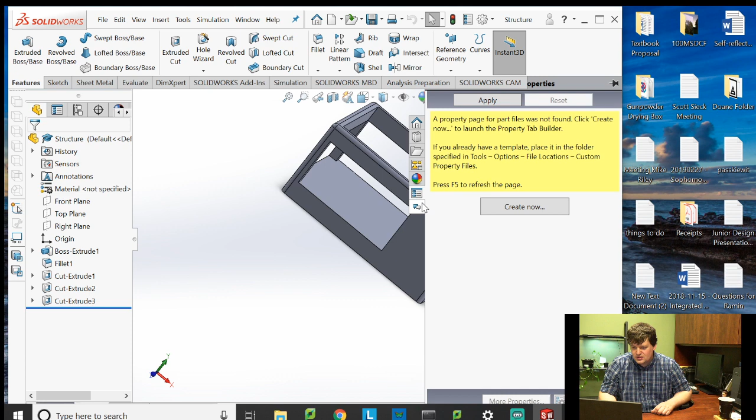Oh, you mean get bigger? I don't want you to get bigger, I want you to get smaller. Why are you so unnecessarily irritating?

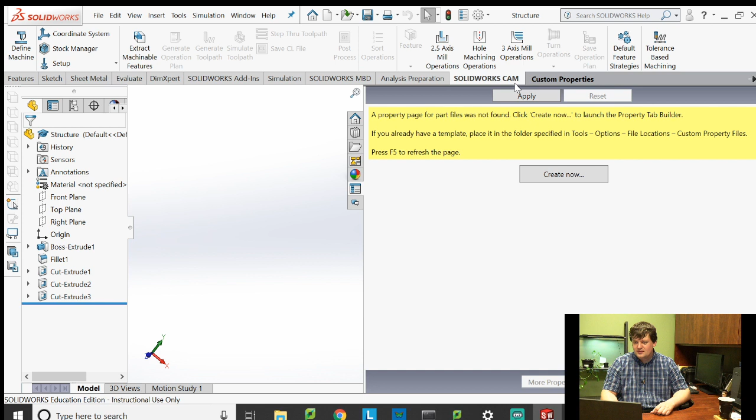Yes, hi, I am teaching you SolidWorks, and I'm struggling with very unnecessary issues. I can't see it because the button I need to push is right here. I'm going to have to hide a few of these.

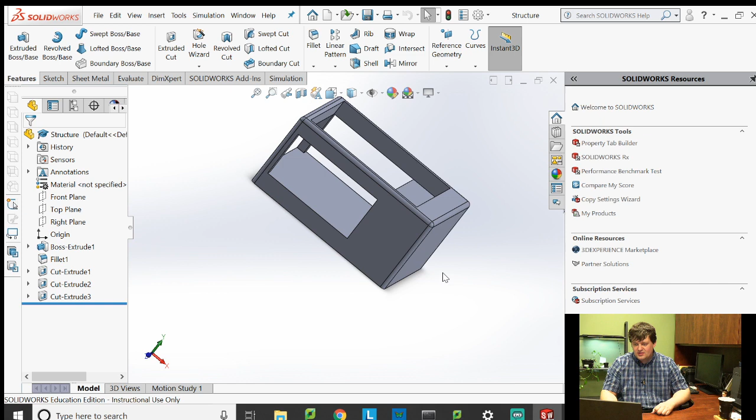Awesome, okay, so here's my structure that I built last time. Let me check, okay. Man, I wish I could make that go away. It's like you can either make it stupid huge, or you can make it kind of huge. Either way, you don't like it.

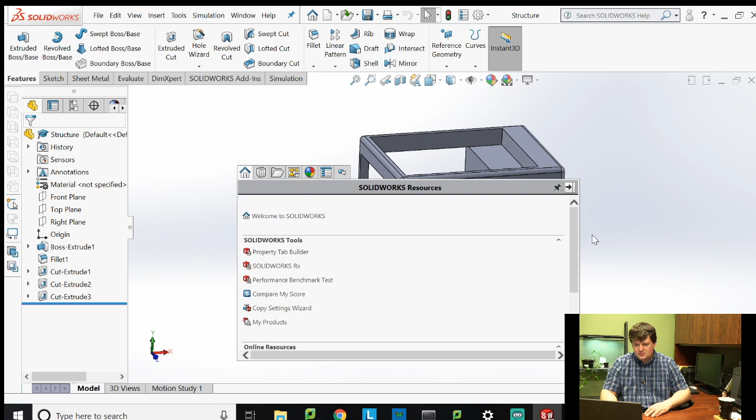Ooh, I can go directly into the SolidWorks forum right here, did not know that. I don't know this. Die. I only want you gone. I call you my only friend, but I have many friends.

I'm gonna hide it over here, not best practice. I cannot get that thing to go away. I want to pop this up so that I can actually see in case somebody leaves a comment. So, okay, I was doing so well at the beginning. Started out with a great video feed, everything looks good.

Anyways, okay, what we're going to be talking about today is assemblies. Now, assemblies are kind of a weird thing to deal with, because if I were to just take this into an assembly, this looks fine, this is a great part, perfect. But I haven't built this in such a way that I'm intending to connect things. The hardest part about any mechanical assembly, any one of them, is always going to be in how you get the parts to connect together.

There's no nice formula of, oh, well, just glue them. No, that's not always best. And if you're looking at a system like this, where are you gluing it at? How are you making sure it's staying in the same place? How are you going to glue it and then make sure that the wires connecting to it, that are powering it, are getting the power and aren't being jumbled? So really, anytime you go to make an assembly, you have to start thinking: how are my pieces going to come together?

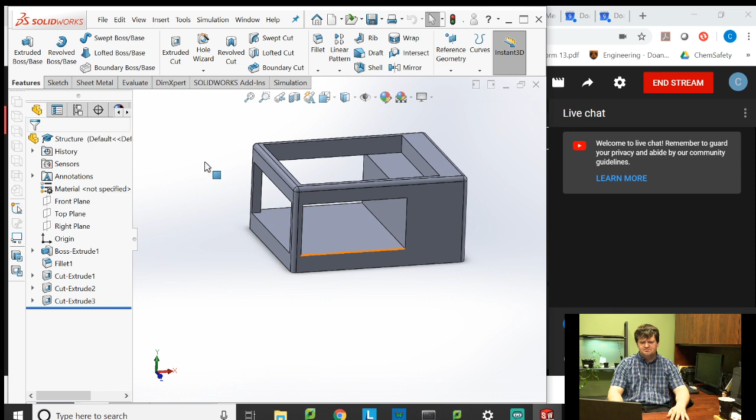So go to File, New. This is how you create new parts, new assemblies, or new drawings. Here we don't want to do an assembly yet, we're going to work towards it, but we're going to start by building a brand new part. I'll hit OK.

And I've got a new part. You'll notice that my SolidWorks down here now has two windows in it. I can either go back to my structure or go to my brand new part. It's kind of nice to have both of them open, though SolidWorks sometimes hates that because, quite frankly, it's murder on your CPU and GPU. But I'm going to go in here, and the first thing I'm going to do is go into Sketch, and click Sketch.

Sketch on the top plane, because that's how I roll. Make sure that my axes are orthogonal. If it's not orthogonal, it's rotated like something like this. You can just click on the Y-axis, brings you right back here to where you can see your origin is pointing up and to the right, so we're in a good place.

Clicking, if I double click here on the Y - whoa, I clicked out of the sketch. Let me click on top plane again. Now it's sketch 2 because sketch 1 disappeared. If I double click here on the Y, you'll notice that it flips this. What it actually does is it flips around, takes your view, and looks at it from the back side - like you're looking at the front side of your hand versus the back side of your hand.

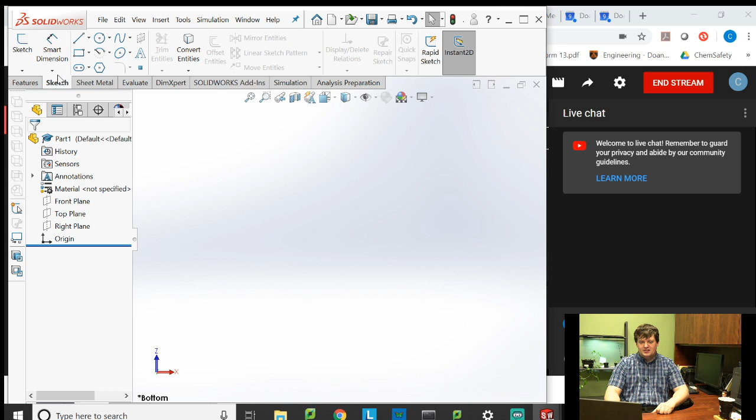Okay, I exited out of my sketch again. Double click out here, apparently it doesn't like it. Oh, he's done! I was not done. I want to make a plate.

Now what I'm going to do for my hot plate is, my hot plate is probably going to have a heating element embedded in it, and it's probably going to be cast iron. A lot of hot plates are very, very good conductors of heat - basically a giant heat sink. Thick, sturdy, robust, impact resistant. We can coat it with Teflon.

I'm not going to include the coatings on this. I don't know how to do that in SolidWorks, and quite frankly, just putting an arrow that says put a Teflon coating on this is way better. It does everything you need it to do.

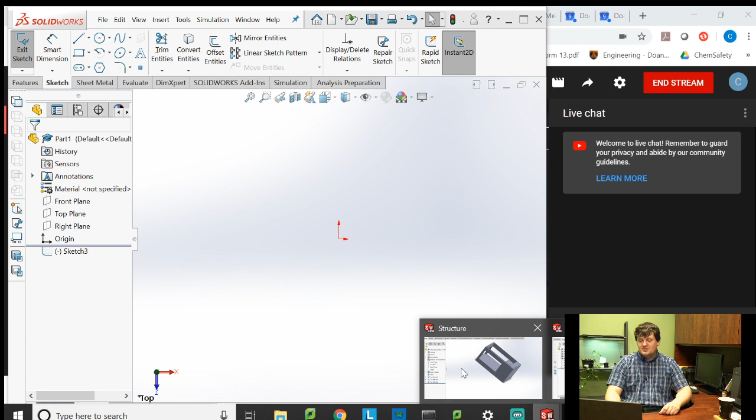So I'm going to go back to my old file and say, okay, I'm going to be building a hot plate that is going to be going right in here, in this microwave-like box. I want to have some kind of a hot plate where there will be some connection for wires, some place where I can bolt it in, maybe pin it in, something. But as I'm thinking about this, I've got to think, how are these parts going to go together?

Because I'm going to have to make both of them such that they do go together. If they don't go together well, it's just like, hey, got this hot plate, throw it on there, you pick it up, it slides off. That's not quite good. How are we going to affix these two together?

We have a lot of different connection options. You've got bolts, you have glue. Glue and epoxy are acceptable, but if you're going to do something like that, usually it's good to create a profile on both pieces such that they fit nicely together, and then you epoxy it, because then it will always be in one place. The person who goes to assemble it will take the hot plate, cover the bottom of it with epoxy, and then stick it into some hole that has been specially designed only for the hot plate.

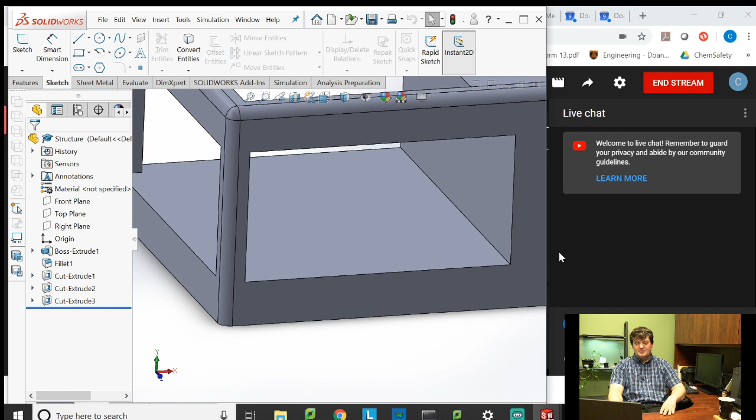That's good practice, because then there's only one method of assembling it. We're going to talk a little bit about design for manufacture, design for assembly later in another lecture, but just giving you a preview here. It's really important to think about how these are going to be built. I could build this fairly easily, but to attach anything to it would be harder the way it's built right now.

First things first, I'm going to go to the top view. This is my old drawing, and now the distance from here to here is basically my window between these four walls, the window that I have to build a hot plate in. I can slide that hot plate in from the side, probably have to turn it at an angle, and then lower it down and connect it somehow.

What I'll probably do is, for simplicity's sake, slide the hot plate in, and then bolt it in at the four corners. I'd probably use some kind of special protruding bolt with maybe a rubber gasket, a rubber head on that bolt so it doesn't corrode, probably coat that with Teflon too. In any case, I'm going to have to make bolt holes in this structure so I can bolt it to it. Simply enough.

So first I need to know these dimensions so I can make a hot plate. What I'll do here is, before I build the hot plate, I'm going to go to the top view by clicking on Y, or I can go to View Orientation and click on that top view. Here I'm looking at the top view.

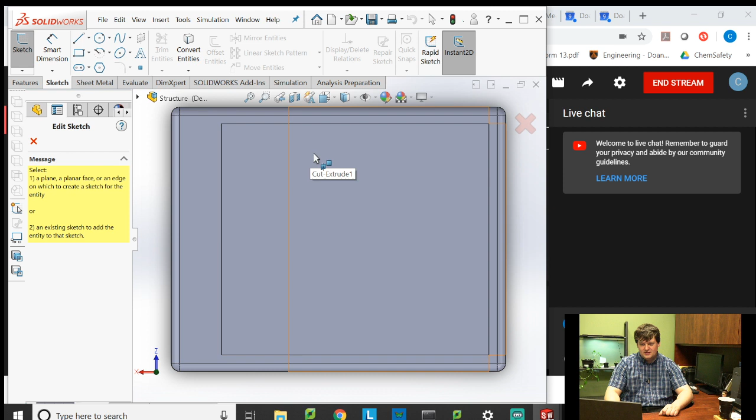I want to make a hot plate that goes in between these four lines. So that's awesome, I'm going to go ahead and draw a circle. I clicked sketch, clicked on here, and now I'm drawing directly on the bottom of where I want this hot plate to connect to.

Okay, so here's the front corner, here's the front face of it. I'm going to create this circle. And what I'm going to do is say, what is a typical bolt dimension? Well, I like 1/4 inch bolts.

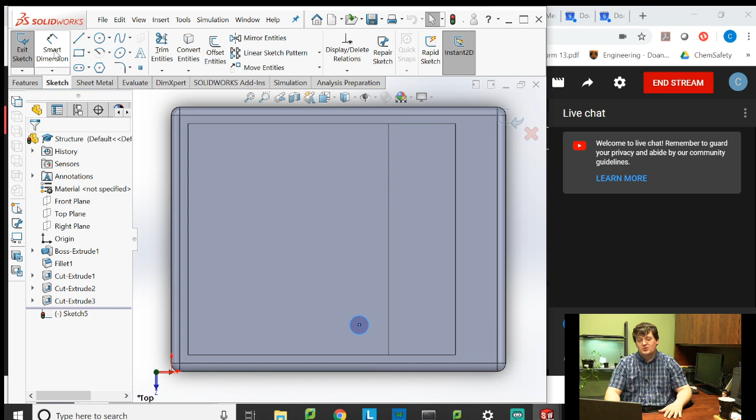So I'm going to click dimension, click on this circle. What I can do with the dimension on the circle is say how big the circle is going to be. Right now it's about 1 and 3/16, which is a gigantic bolt. I don't need a bolt that huge to connect these, so I'm just going to type 0.25. Okay, that's going to shrink the size of this hole down significantly.

And if I zoom in on it, you can see it's still there. I don't know where it's located at, I just know I have a 1/4 inch circle that I'm going to turn into a hole.

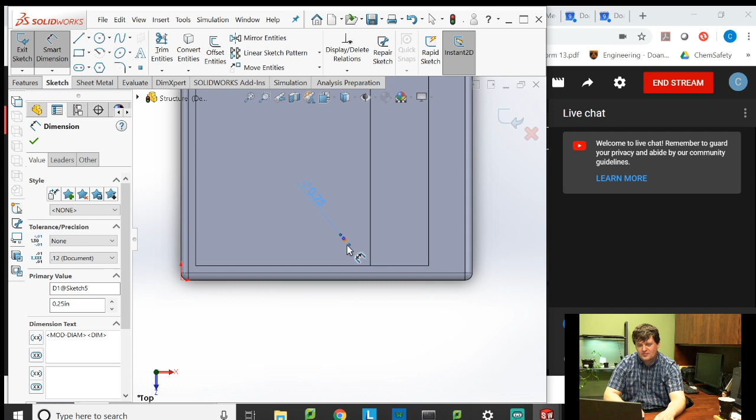Now I want to dimension from the center of this circle to this edge right here. I don't want to put my bolts directly on the edge, because then the cast iron might shatter - it's really not very strong. You might get some sliding in there. If you put it a little bit inset from the outside, it's better.

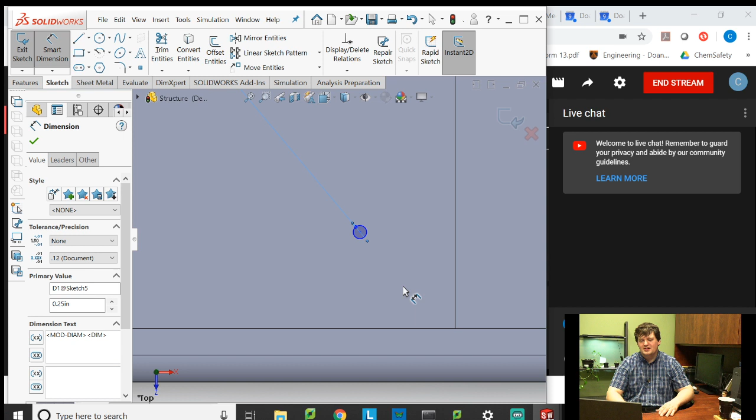So what I'll probably do here for my hot plate is make it go all the way to the front and back on this side, but it won't go all the way outside here. So I could probably put this dimension from this face here to the circle.

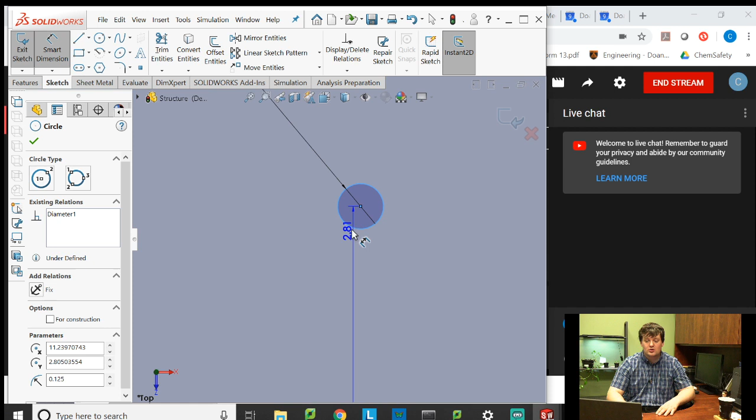Now, if I click on the circle and click on a line, it automatically goes to the center point of that circle because it realizes you can't dimension anything else on a circle. I could maybe select a 1/4 point on this circle - top, bottom, left, right sides - but it automatically defaults to selecting the center of the circle. And I've got this line, and now it's calculating the perpendicular distance between them.

That perpendicular distance - a point and a line only ever have a perpendicular distance. Because any other distance, like if my angle is going out this direction, suddenly that changes the dimension. If my angle is going out this direction, the dimension becomes much larger. A perpendicular distance is a constant value that you can share between a point and a line.

So click on this - I don't want it to be 2.81 inches from the outside, I want it to be 1 1/4 inch. Okay, so 1 1/4 inch from the outside.

And then I'm going to dimension from this face here. Notice I can actually select the center point of the circle. If you just select the outside of the circle, it will also select the center of the circle. So it's like 2 different options to do the same thing.

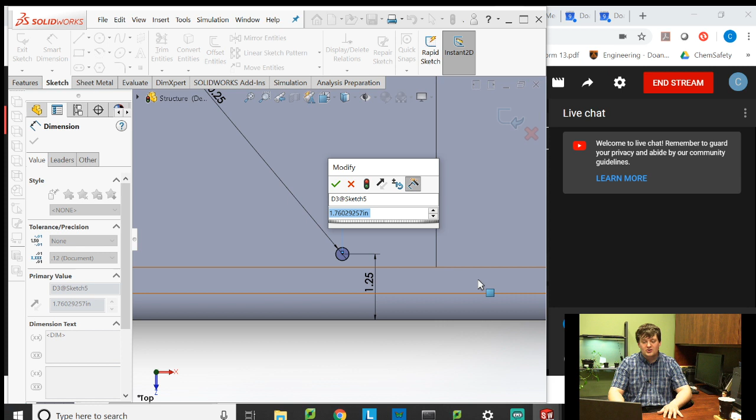I'm going to make this one come in also 1 1/4 inches. That's nice and square, so I got 1 1/4 inches from here, 1 1/4 inches from here. Good to go, this is my first bolt location. I'm going to unclick Smart Dimension. Now this circle here is fully defined. I'm going to want 4 of them, 1 in each corner.

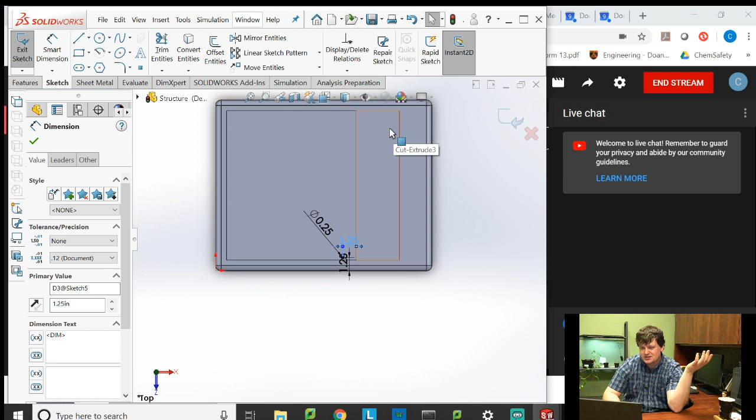There's a couple different ways of doing this. You can do a linear sketch pattern and go ahead and specify this distance here and this distance here. That's fine. I don't really want to do that, because if I change my dimensions here, then... well, you know what, I'll do it anyway. I probably won't make this dimension.

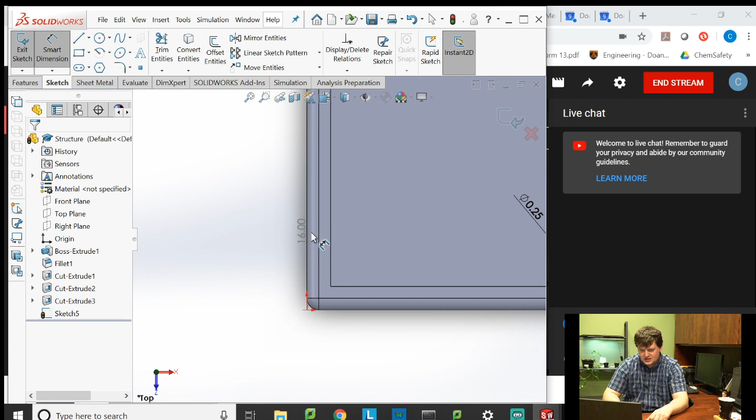I need to know some information before I do a linear sketch pattern. I need to know my distance. So where are... I want to do a linear sketch, I want a dimension, I want to know how long it is from here. Oh come on, let me select that. Oh, it's not letting me select that. Oh, that's unfortunate. Where is...

Ah, there it is. So if you go into your Evaluate tab, you can click on Measure. Measure is basically like dimensioning, but it's specifically for when I want to know the distance between two lines, the distance from here to here. If I click on these two lines, it'll tell me this, the 2 points that I click, this line is 14 inches long, which is great. This whole thing, I believe, is 16 inches long.

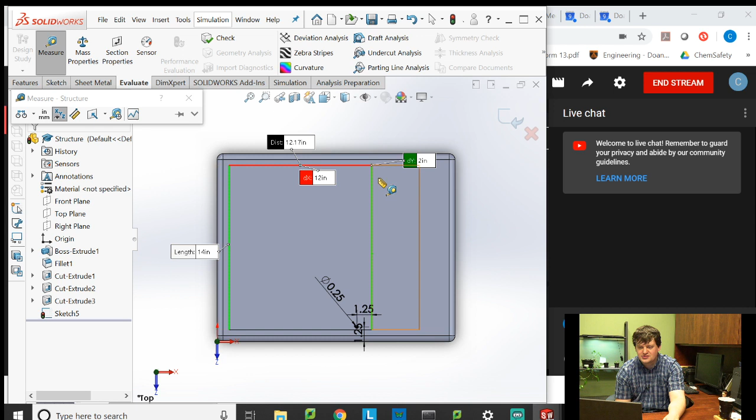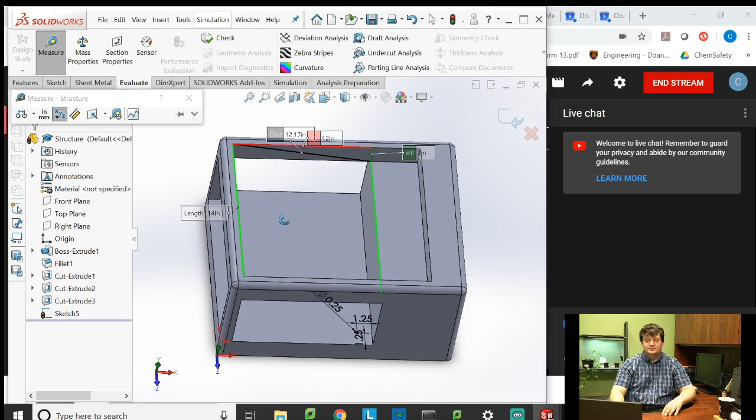But this distance here is going to be 12.17 inches - 12 inches in the X direction, and 2 inches in the Y direction. Now one of the issues we have is one of the edges we're selecting is down here on this plane, while the other edge is up here on this plane, so there's actually a 2-inch drop between them. So if I just look at the distance number, it's not quite accurate. The X number is accurate because it's only in the X direction. You'll notice there's a 2-inch drop there - that distance is actually measuring across that angle.

So if you're going to use the measure command, be careful because it won't give you a dimension just in that view - it'll give you a bunch of information, and you need to know which one to really look at. Here I only care about the X distance between here and here. I don't care about the Y distance, I don't care about the actual distance between those lines, I only want the X distance. So 12 inches is what matters to me - I'm going to have to make my hot plate 12 by 16 inches.

Go back, look at the top of this device again, and I'm still in the sketch - I haven't left the sketch yet. Now I'm going to go ahead and create a linear sketch pattern. On the x-axis, this is 12 inches. I have it at 1 1/4 inch, and I want this to be 1 1/4 inch on the side, which means 12 inches minus 1 1/4 minus 1 1/4 is 12 inches minus 2.5 inches, which is 9.5 inches. So my spacing in the x-axis direction is going to be 9.5.

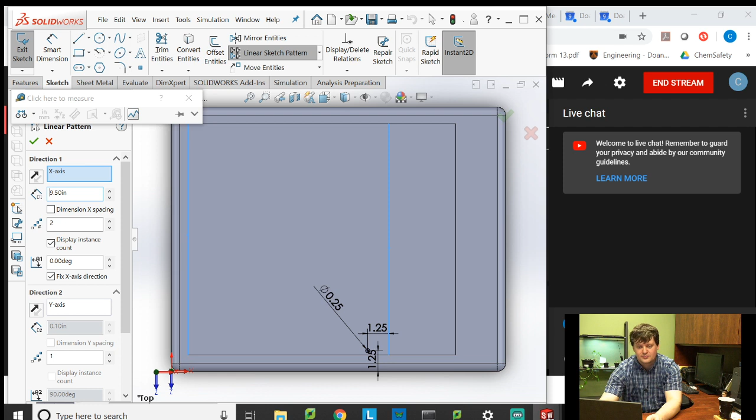I'd actually be putting it way out there, I don't know where - oh, I haven't selected an object yet. Okay, in the y-axis - I don't want just one row, I want 2 rows. As soon as I do that, now I can enable putting something in the y-axis, and I want this to be this overall distance, 16. This is 1 1/4 inch - I want this distance here between the hole and the outside to be 1 1/4 inch. So 16 minus 2.5 makes this 13.5 inch spacing.

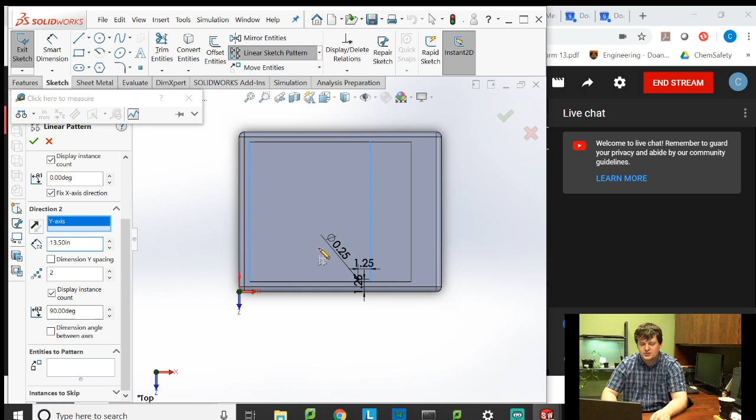13.5 inches, okay. Notice it's still not showing anything up here, nothing is changing. I've put in my numbers, did the calculations. I have 0 degree offset, I have 2 by 2, 2 rows, 2 columns, it's going to create 4 total. I haven't selected an entity to pattern - that's a problem, it doesn't know what I want to create a linear pattern out of.

So I'm going to go in here, click Select Entities to Pattern, go in here and select this circle. Now as soon as I do that, you'll see it's created a rectangle. I want it to go this way, I don't want it to go this way, I want it to go that way. So what I'm going to do instead is flip the direction of the x-axis - it'll move it this way. And now what I see is 1 1/4 inch from this direction, 1 1/4 inch this direction, 1 1/4, 1 1/4, all equal spacing. Kind of a weird optical illusion because there's no way this distance is equal to that distance.

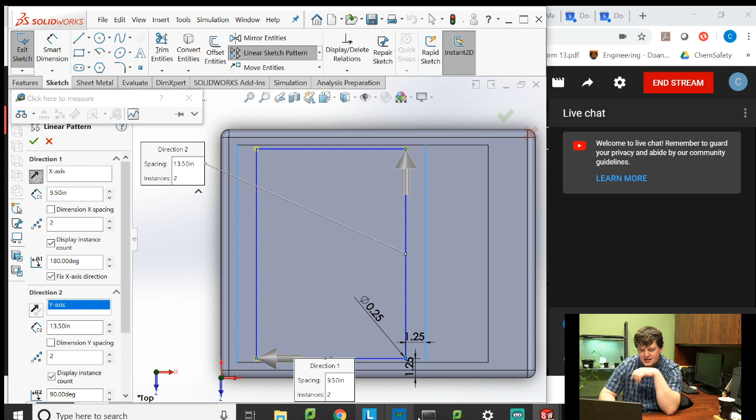Oh wait, that's right, we want this distance. We're in a good place, we're okay. And this distance up here is equal to that distance down here. Whole thing looks good, I'm going to hit yes.

Now that's one way we could do it if we wanted to drill all the holes at the same time. We're going to hit exit sketch, it'll create those 4 circles. I'll go back into features, and instead of doing the extruded boss base or the revolve, which is also a cool feature, we're going to do just another extruded cut.

You can do a hole wizard, but I don't like those. They're very challenging to work with for me. Never quite figured it out.

Here it automatically selected the sketch plane because that's what I had picked. If I scroll around, it'll show you where these are cutting. It's only cutting 1/10 of an inch. You know what? Let's cut into this thing 1 inch. Let's have a nice, good, deep bolt set. We're never going to have this hot plate move.

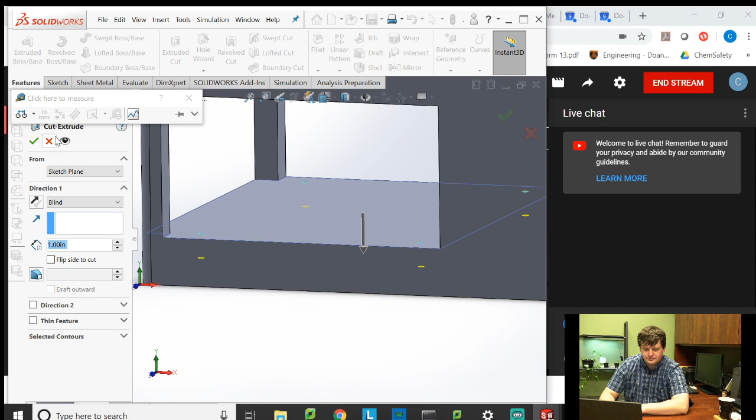Okay, so I cut those 4 holes. Now I have mounting holes for my hot plate. Why is that important? Because if I think about how they're going to be connected, if I can make mounting holes also in the hot plate, I can align them, and that's going to very nicely allow me to connect these pieces together. So just thinking a little bit to the future.

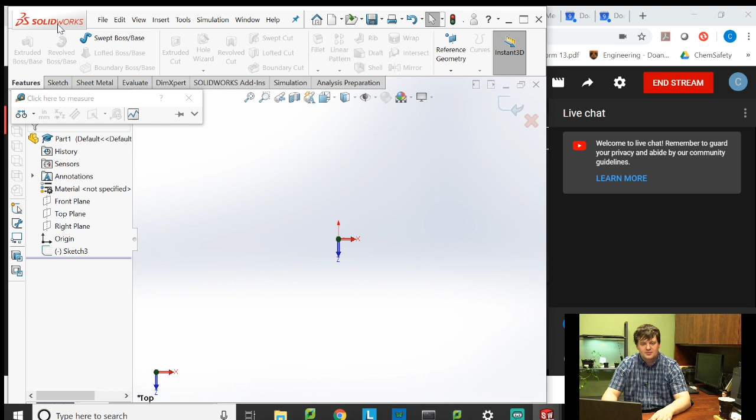So I got my bolt holes here. Go into my brand new part. Here I am currently in a sketch. I'm going to draw a rectangle. This rectangle is going to go from the origin out like this.

Hit escape so that I'm not doing a rectangle anymore. Click on Smart Dimension. This is going to allow me to size this rectangle to whatever size I want it to be. Click on this line. See, it's going to be 12 inches by 16 inches. 12... oh, I got so close. 16.36. Okay, my hot plate.

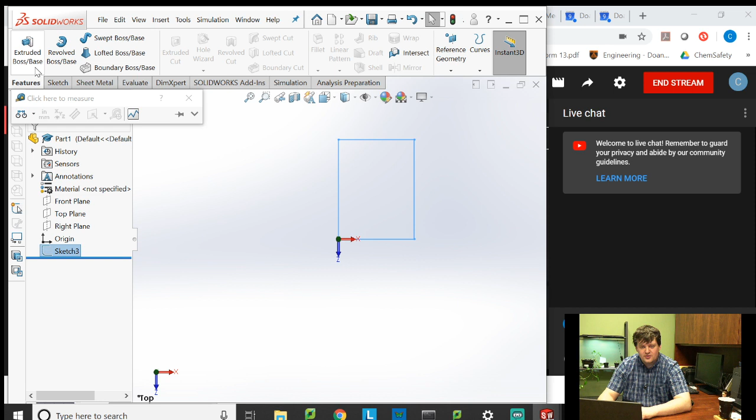It's very platey. We'll go ahead and exit sketch. I'm going to select my rectangle. We go over here, boss base extrude. And how thick do I want my hot plate to be?

Well, what I want to do for my hot plate is I actually want it to be kind of thicker on the outsides and then thin in the middle, so that if you pour too much pancake batter on it, or the pancake batter is too watery, it doesn't just start shooting everywhere. I don't want to get any pancake batter on any of my electrical components.

So I'm actually going to extrude this out to be probably about 1 inch thick, it's a pretty hefty piece. And then what we will do is we will go back in and cut out pieces. Probably, since this is cast iron, it would probably be die cast, we'd have a cast of it. That means that it wouldn't require a ton of machining, which means we aren't losing material, thankfully. But it is still going to be a pretty heavy piece when we're done with it.

We want this to be kind of like a bowl shape. But I'm going to start with, I'm going to start by making this 1 inch thick.

Okay, so here's my 1 inch thick, gigantic cast iron hot plate, which is unnecessarily huge. Awesome, basically like a giant sheet.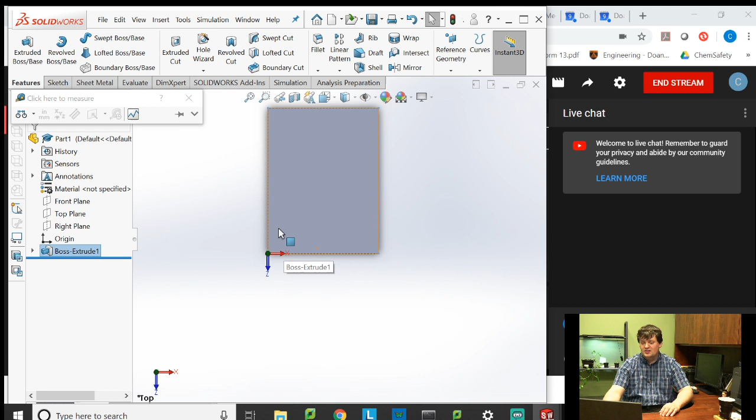So I'm just going to do this, keep it simple, stupid, KISS style, and we'll go from here. Now I do like making things pretty, so we'll keep it stupid while also being very pretty. I think it's a great way to flex your strength.

So my first task is to take this plate and I'm going to drill those 4 connection holes, because that matters to me.

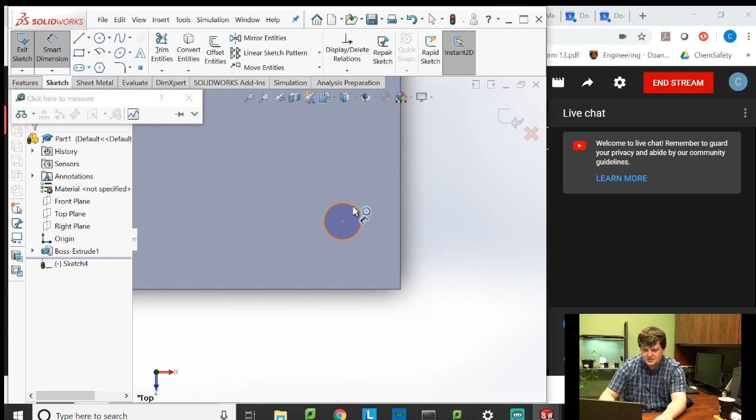So I'll do a second sketch, on this top plane here. I'll click on it, make sure that my orientation has got this flush. And then I will do the same thing that I did to create the other circle. I'm just going to draw a circle here, go and smart dimension it. When I smart dimension it, it allows me to size that circle. So now this is going to be 0.25 inches.

Tiny circle. And then I'm going to select how far it is from the edge. This was 1.25 inches. And I want this to select how far it is from this edge. I want that to be 1.25 inches. Huzzah! Got one hole.

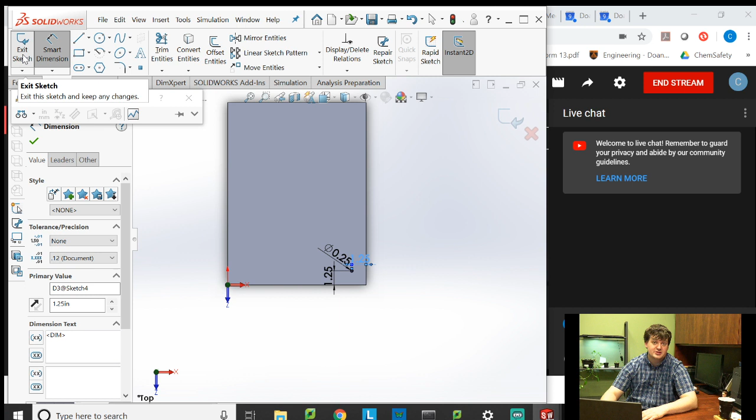Now, the way that I did it last time was I clicked linear sketch pattern. It created a linear pattern of the circles, which is fine, it's great. I'm going to show you a different way to do it. Because we have similar circles that are going across, I would prefer actually to do it as an array of a feature. So here, what we're going to do first is we got the sketch.

The sketch currently isn't doing anything. We got our other sketch that's inside of Boss Extrude. We got this sketch that's out here doing nothing. I'm going to, with this sketch selected, hit Extruded Cut.

Here, I just wanted to go through everything. I don't care what the size of the plate is. I'm going to have a bolt hole that goes from the very top of the plate all the way down. Maybe not the best design practice. Maybe we should have started with the bolts on the bottom and screwed in so that the top plate doesn't have anything.

But you know what? Yeah, I really like having bolt heads in my pancakes. So we're going to do it this way. I don't want to have a blind cut. I'm going to go ahead and pick through all both. That means everything that is inside of a cylinder in this plate will be cut.

I'll hit OK. Now do keep in mind that if I do a cut extrude here, and then my next item on a tree, I could actually create a box that goes over the top of this hole. I can do that, that's perfectly fine. This cut, when I click through all, will only cut through everything that is above it on the tree. It won't cut anything that's beneath it on the tree. So if I drew a square on here, it's not going to cut into that later, as long as it's lower on the tree, if it's a feature I do afterward.

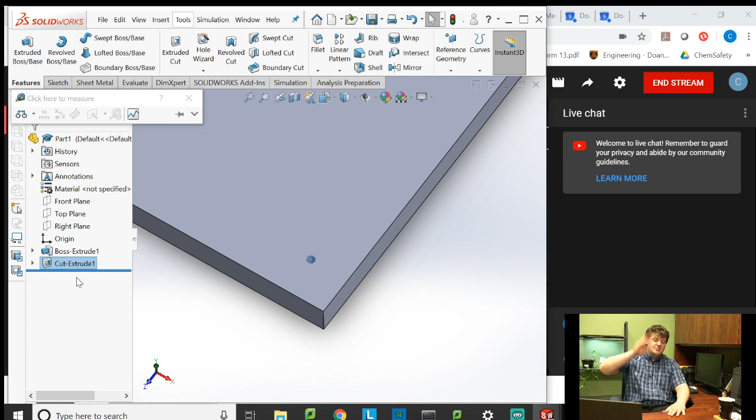SolidWorks is very step by step. So first step was get a plate. Second step was make a cut. Third step is mount something on top of that hole. It wouldn't cut through that hole if that's the case.

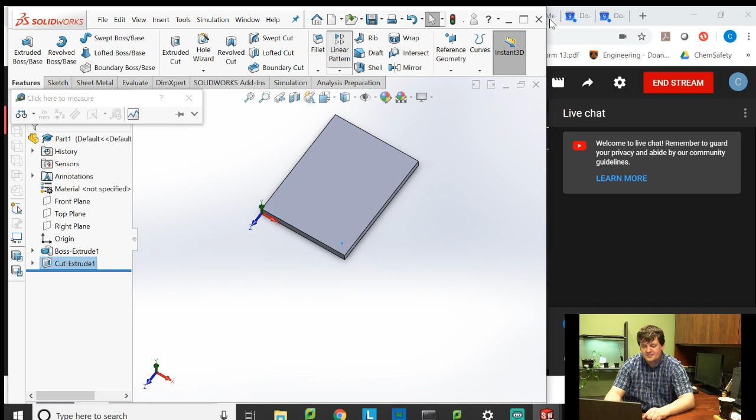Okay, so just a side note. I'm going to take this cut now, and I want there to be 4 of them. So what I will do here is in the Features tab, I'll click on Linear Pattern. Now I've got Cut Extrude already selected, so it's going to assume that the feature that I want to create a linear pattern is that, the Cut Extrude. Right now, I've got this one right here.

Spacing is 0.1 inch. It's basically trying to move it this way, and oh boy! Although, wait, I don't have a direction selected. I'm going to go ahead and pick the x-axis. I can't do that, that's right. I'm going to go ahead and pick this line as edge 1 as the direction. And it's basically like picking the x-axis.

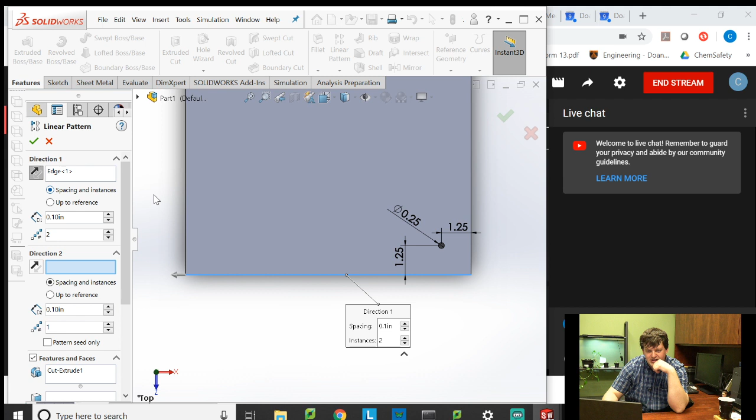Same thing, I believe, happens if you... never mind. I think you can go back here and pick the x-axis. There's another way to select the x-axis, I'm not sure how to do that right now. But anyways, you can select this edge, and what it'll do is this is the distance along this edge that it will create that feature.

And I want that to be, let's see, we had 9.5 inches for our x direction. Cutting, you'll notice it automatically switches this way. You can switch it back if you need to, but it is cutting in this direction. So we've got one set. Now we've got a direction 2. I want it to go up.

And here, instead of having one object, make it 2. I don't know why SolidWorks always defaults to 1. And I don't want it to be 0.1 inches, this is going to be our 13.5.

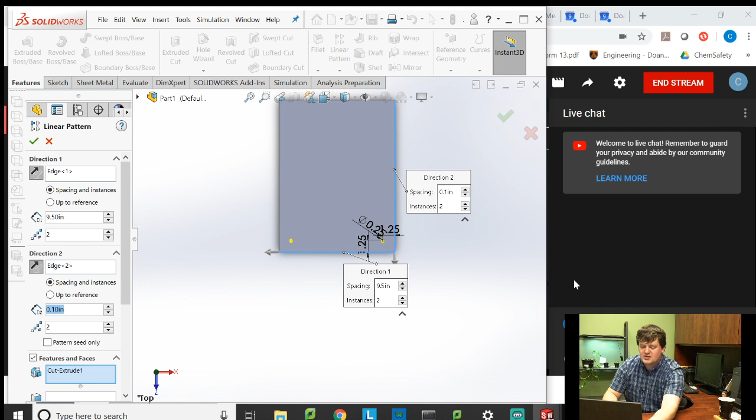You'll notice it doesn't show up there. So go ahead and flip this. Now it does show up. Flip it again, doesn't show up. Flip it again, now it does show up. If I flip it again, I see the holes down here. I'm not cutting into anything right there, so make sure to flip it so that it actually cuts to the right place. So yeah, now I've got these 4 holes cut through a gigantic piece of cast iron metal.

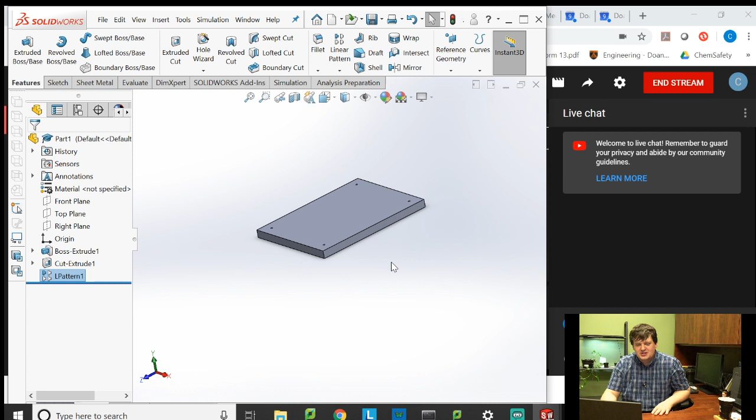Awesome. What do we do with this? Well, first thing I'm going to do is cut a hole in the center here, kind of like a trough for placing pancake batter. That way pancake batter won't spill everywhere when it goes on the plate.

So first thing I'm going to do is create a sketch on this face right here. Orient my axes so that I'm looking right at it. And then I'm going to draw a circle. That is not a circle. It's been a long week already. So there's my beautiful four-edged circle, 90-degree angles. Escape, I'm not doing rectangle anymore.

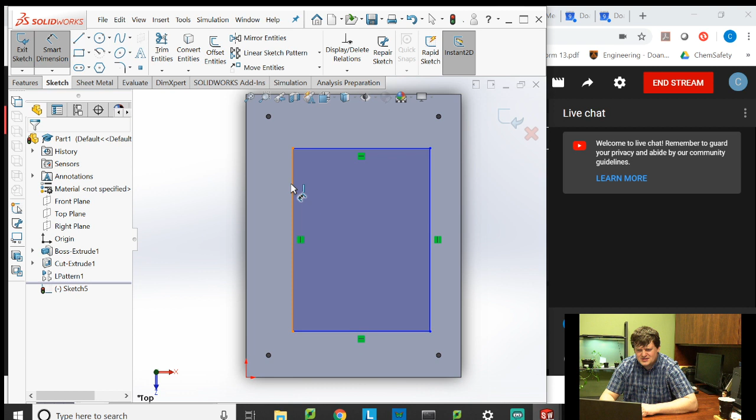And I'm going to go ahead and dimension this thing off the edges. I want this to be, let's see, 1.25 inches from the edge. I'm going to make this 1.75 inches from the edge, so it'll be about half an inch from the edge of that hole it's going to come in. That'll allow me to have at least a bolt head on this.

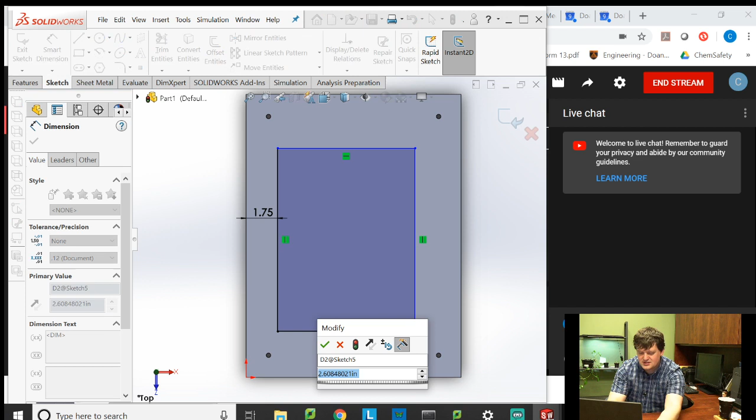Go ahead and dimension this too. I want this to be 1.75 inches. Awesome, let's escape. Now, I could put the other 2 dimensions on, but remember, I keep telling you that having relations are nice.

I want this to always be in the center of this hot plate. So what I'm going to do is select the midpoint here, hover over this, select the midpoint here. Close with it, where it was. Oh, I don't want to select the edge. I selected the edge. There, apparently you have to have the edge selected in order to pick the midpoint.

I'm going to make these horizontal. Hit yes. Now this will always be horizontal here. The midpoint of this line will always be horizontal, and it'll always have 1.75 inches here on this edge. So if this plate shrinks in this direction, it'll still have that 1.75 inch gap. It'll just adjust accordingly. And I want to do it on this side too.

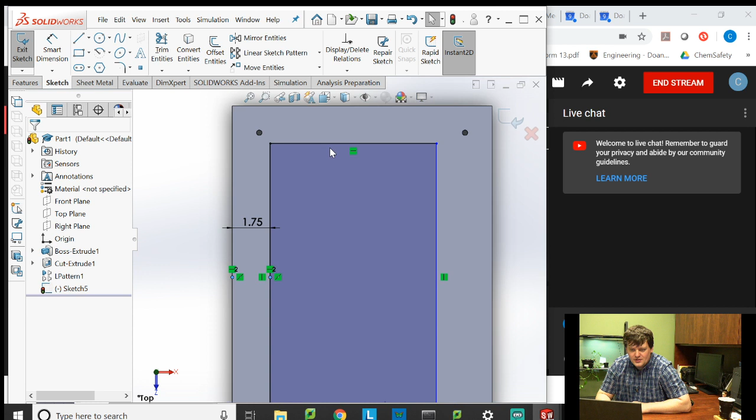So to do that, I go into add relation, pick the center point of this line. Oop, I've already got the other point selected, so I need to delete them out. Point, don't want the line. Okay, then we pick the point here. It makes me pick the edge before I pick the point, which is an annoying nuance.

SolidWorks. And then I'm going to make these vertical, so these 2 midpoints are going to be vertical, these 2 midpoints are going to be horizontal. I want 1.75 inches here, and 1.75 inches here. That'll give me a 1.75 inch boundary all the way around. Using relations, if you understand geometry, is really, really helpful.

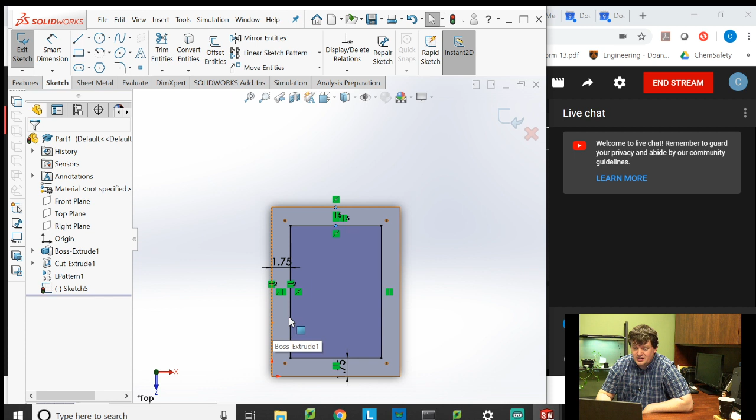So here now I've got this rectangle. I'm going to go ahead and cut it into this piece. So I'll exit sketch. I don't want this hole to go all the way through, I only want this to go part of the way through. So if you remember, we go to Features, Extruded Cut. I've already got the sketch selected, and it knows that I want to cut into the material.

If I pick 1 inch, I'm going to cut all the way through. I don't want this to go 1 inch, I want it to go 5/8 of an inch, so I'm going to do 0.625. Okay, it won't quite cut all the way through, but it'll make it really thin and give me kind of a nice trough there.

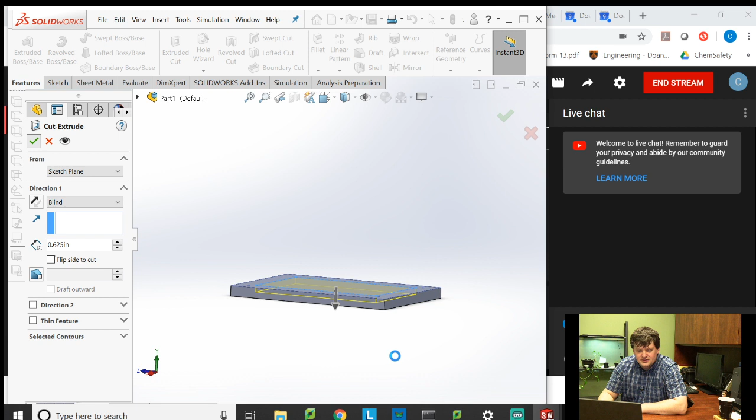So now I have a plate, and this plate has a hole, kind of a trough where I can pour my pancake batter. I'm going to assume that down here there's some heating elements or something that's warming it up. Maybe the heating element is actually in the base, I don't know, but I'm going to say this is good enough for my hot plate.

Okay, so I will go ahead and file, save. When I save this part for the first time, first of all, I've got to navigate to my pancake printer folder.

I'm going to want to make sure that I save it in the same folder as I save my structure. If I don't do that, it's going to cause me some problems.

Remember what I told you before: put all of your parts in one folder, and have nothing but those parts, assemblies, and drawings in that folder. If you ever need to make edits or create a new version, copy the entire folder, paste it, and begin working again. If you don't do that, you lose all of your assemblies and drawings, and it's a really big pain to rebuild those. More than likely you'll end up having to do that at some point, because no matter how many times I tell you, you can't learn unless you do it yourself.

What do you mean, put all your folders, copy and paste parts? Yeah, no, you will learn by mistake. Unless you can be really good about learning it the first time I tell you, the second time, the 15th time, you will learn by making that mistake.

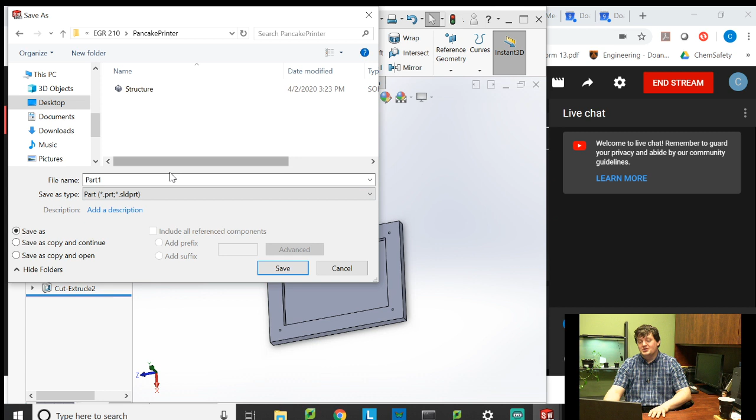So, okay, I'm going to go ahead and name this hot plate. It is a SolidWorks part, and this is looking good. I know the spacing here is equal to the spacing here for these holes, and I know this plate is flat on bottom, ready to be mounted directly to that.

So I'm going to go ahead and go File, New, and create an assembly. Now I have the two part files open right now — the structure and the hot plate. When I go in to create an assembly, it's going to know I already have those two parts open.

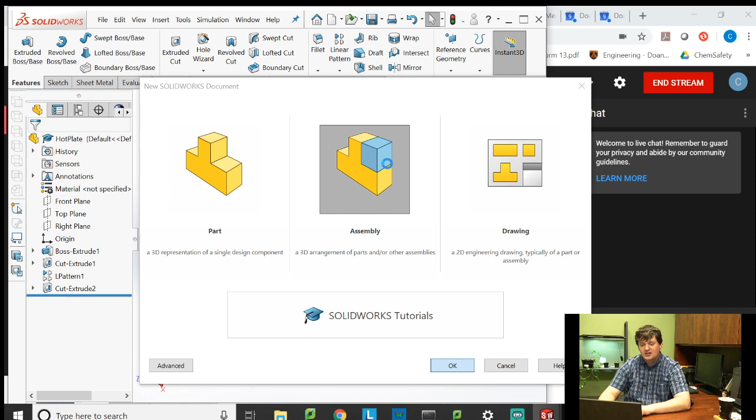What you do in an assembly is take parts that are individual pieces and hook them together. It does allow you to move pieces if they can be moved, and it also allows you to connect pieces together. So we're going to talk a little bit about that.

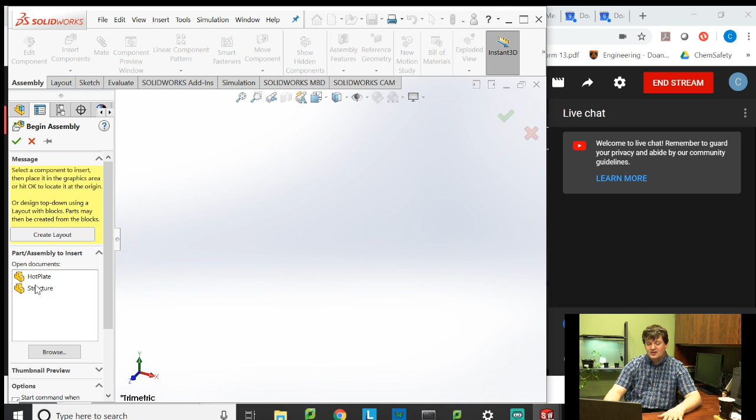Now I've got my open documents right here — I've got hot plate and I've got structure. The first thing you put down in an assembly, SolidWorks fixes it, locks it in place, and assumes you cannot move it, which is kind of what I want the structure to be. I'd suggest picking the structure first. And here I've got my structure. Structure looks hot.

Although it doesn't look as hot as the hot plate. Boy, I really wasted a joke on that one.

But this is it — this assembly has not saved any of the geometry of this part. The way SolidWorks has to work is it continuously regenerates a model based on existing parts. So if I go back and edit this piece right here, it's going to know I edited it, and it's going to update the assembly. It'll ask me, and then it'll update it.

SolidWorks does not save the geometries in the assembly. It does not. This is why you have to put parts all together in a folder, because if you lose one of those parts, it gets lost from every assembly it's in, every drawing that references that assembly — it just causes a cascade of problems. So save all of your parts in one nice, neat folder.

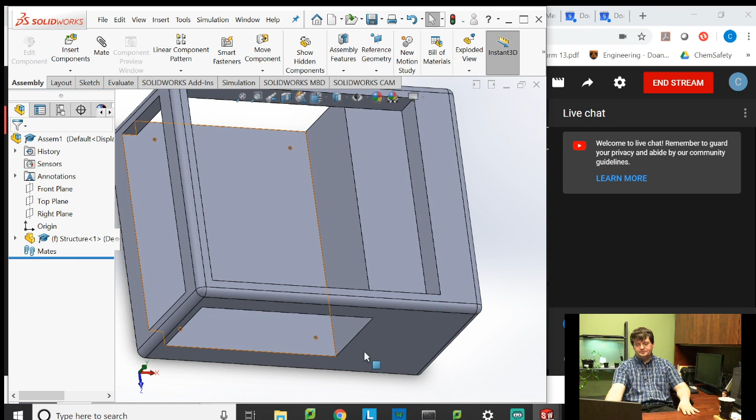Okay, so I've got this piece in here in my assembly, and there really isn't anything I can do. When you're building an assembly, the purpose isn't to edit the parts — it's not to make cuts, changes, anything. Remember, it doesn't save the actual physical geometry of this piece. So an assembly is not intended for me to actually go in and edit it. It's intended for me to put things together, assemble them. That's why it's an assembly.

So the next thing you'll notice on this tree over here, I have structures, structure 1, located here, with all of the pieces associated with it that have been imported. This entire tree is the exact same as the tree I have here, and I can pop it out and look at it at any time. Oh, I did this with 4 cuts, 1 extrusion, and 1 fillet.

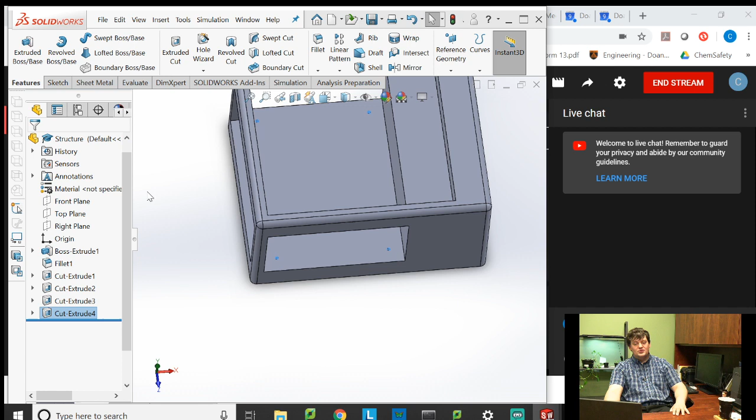So that's one of the nice things about an assembly — you can look at that, reference it, click on it. It actually does allow you to edit it, but it's never good practice to edit parts in an assembly because, wow.

Oh, excuse me, getting tired. So let's hurry up and finish this because I'm getting tired. I know you are.

So let's put the hot plate on here. What I'm going to do is go into assembly and click insert components. That's going to pop up this dialog box we saw at the very beginning, saying we have these two open documents. If I wanted to put it in another structure, I could connect them together if I really wanted to. I can make a monster pancake printer, just an amalgamation of multiple ones, but I don't want to do that.

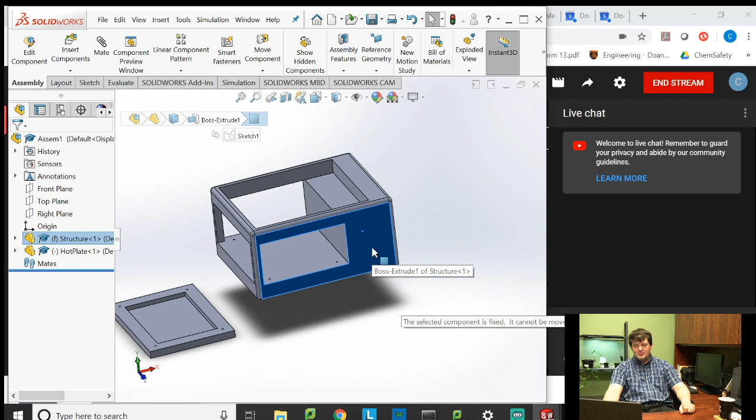Instead, I'm going to take the hot plate and put it in. You'll notice I click once on it, and it assumes I'm going to put it down. I'll just go ahead and put it somewhere over here. This piece I cannot move - if I click on it and drag, it gives me an error message: the selected component is fixed, it cannot be moved. This piece right here is basically like having a part laying around on the table. It can go wherever I want it to. I can move it, throw it up and down, bounce it like a basketball.

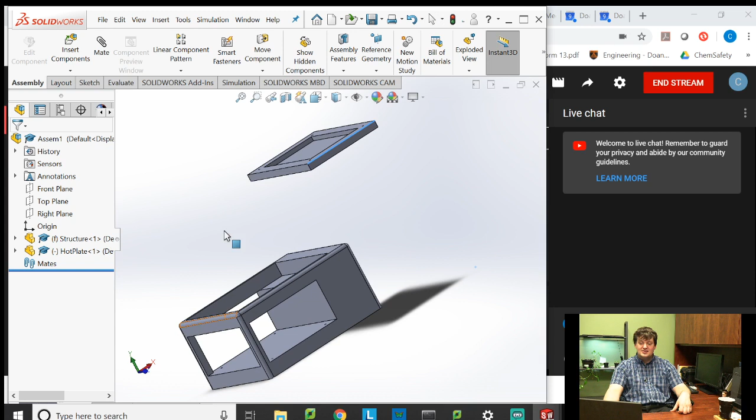Sorry, I just get really happy. I have no idea where in space this is. If I rotate in a different direction, I can move it more in the XZ plane. If I rotate it in this direction, I can move it more in the XY plane. But I really don't have any idea where this thing is in space, and SolidWorks doesn't either, because SolidWorks is waiting for me to tell it. Now this is already nicely oriented - this is going to fit nicely right in there.

But how do I make that happen? Well, the first thing you do, as I emphasize in your drawings, is make sure to add relations. In an assembly, you also add relations, but in assembly they're called mates. You know, hi, good day, mate - gonna put another mate in the barbie, gonna put another mate on the hot plate. It's a mate, and what a mate does is tell you the relationships between components.

So in a part, your relations tell you the relationships between points, lines, edges. In a mate, it tells you relationships between edges, points, parts, faces - between two different parts. And the goal of putting in a mate is to try to make things stick really nicely together.

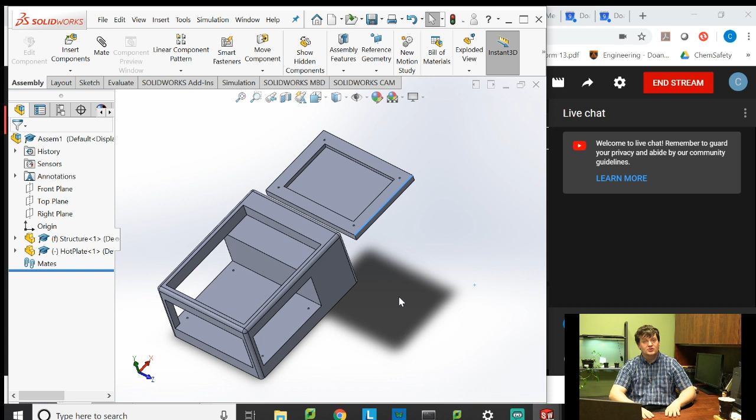Okay, but right now I'm gonna create a mate. I'm gonna put this piece right here. What I want to do first is align my bolt holes. I created 4 bolt holes, but I only need to align 2 of them.

If you think about it - if I were to show off some of these really nicely made wooden coasters, and I take these 2 pieces and drill a hole right on this corner, and align this corner here with this corner on this one, I can still rotate it about here. It's like imagining you put a bolt through these 2 corners - I can still rotate it this way. If I put a bolt through these 2 corners, I can't rotate them anymore. I have added sufficient constraints that now these 2 pieces are basically fixed together. If the bolts are long enough, though, I can still pull them apart this way - I cannot rotate them, but I can pull them apart.

So we only need to align 2 bolt holes. I'll show you that right now in this drawing. I'm wondering how me having a live view of myself is working - I'm going to watch this video afterwards and probably say some mean things about myself. So first things first, I want to align this hole and this hole.

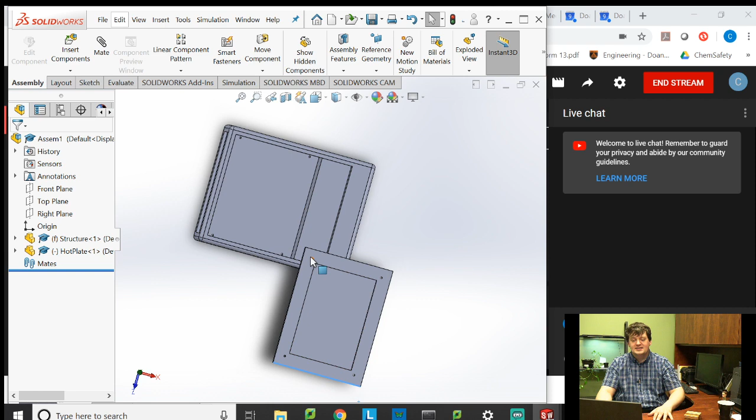One of the things SolidWorks automatically does is hide the axes of all your circles in an assembly. You actually have to go in and manually change that. So I'm going to go up to File - I'm in my Assemblies drawing - go to File and Properties.

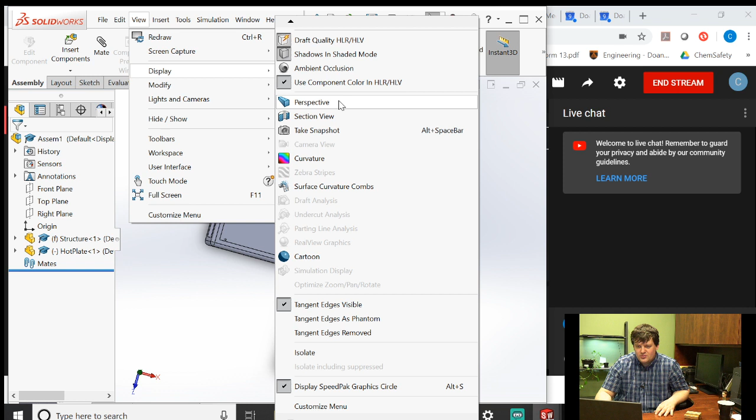It must be... where are you? Not appearance... oh man. Oh sorry, you go up to View and Display. This gives you all the different options of things you can display. Everything that looks selected has already been picked. You can show them as you want. Where is it... seeing what I want to see. It's not on display.

Well, I'm sad, I thought I knew how to do this. Tools... what was it? View. Okay, well, oh it is, yes, okay so it's in View, Hide Show.

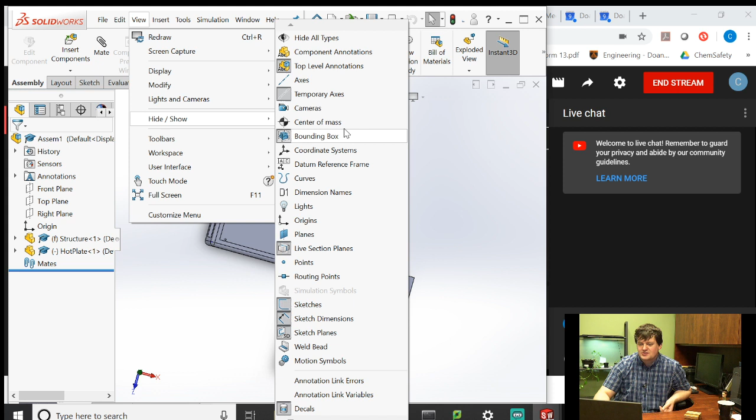If you go into Temporary Axes, what this will do is if I click on this, the box gets grayed out, meaning I'm showing this. You can also show where each component's center of mass is. Be careful turning on too many of these because it'll make your drawing really ugly very quickly, you'll just have information everywhere. SolidWorks keeps all that information, but I just turned on temporary axes.

Now if I zoom in on this really close, you'll notice there's a line in the center of that circle. That is an axis that was generated by the extrusion of the center point of that circle. This basically defines the center line of that circle.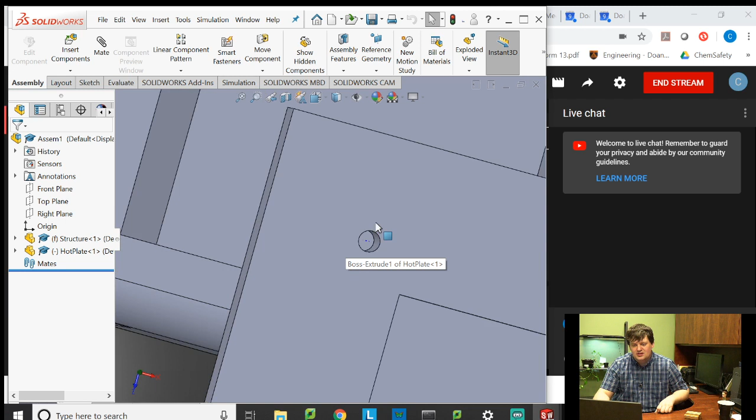So once again, go up to View, Hide Show, Temporary Axes. I believe it also shows with axes, but I'm always used to doing it with temporary axes. Temporary axes are generated by extrusions that are not explicitly stated. Anyways, this one also still has that same line.

It's an axis. What I will do here is I will connect this axis to the axis inside of this hole. Now there is no axis inside of that hole, so apparently I was right by doing the temporary axis instead of axes. There's my axis.

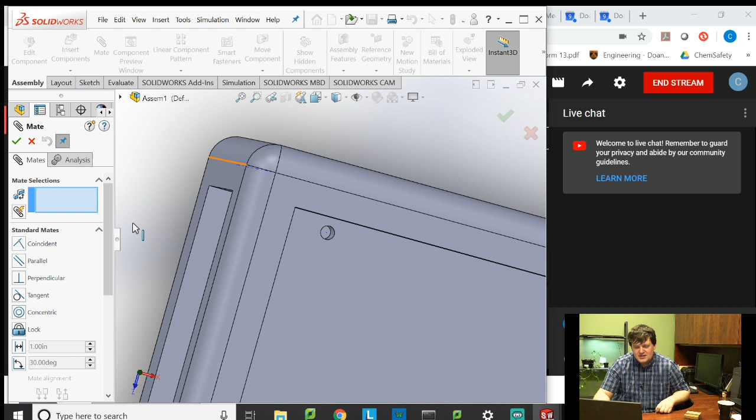I can see these two lines, and I'm going to mate them together. Don't want to have that selected. Look at it here. Okay, gonna go over here in my assembly menu, click on mate, wait for this to pop up. Mate selections works exactly the same way as adding relations.

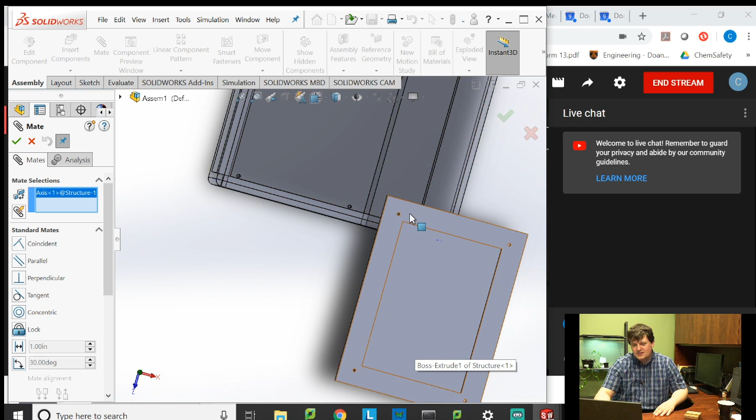If you become really good at adding relations, you're gonna get really good at adding mates. I'm going to zoom in here on this axis, on this temporary axis, click it, notice it says axis 1, it even says what part it's on. Zoom out, zoom in on this hole here, and this is axis 2 on the hot plate.

Thank you for telling me my memory is low, SolidWorks. Yes, I realize I'm losing my memory. Okay, stop. These are coincident. If I make them coincident, it means that those two axes lie in line with each other, almost as if it's one axis that's just cut between the two pieces.

That's what coincident means. If I make them parallel, it forces these two holes to always be aligned with each other like this. That's not really going to bolt them together, but it makes them parallel. I can also make them perpendicular, which does the opposite, making sure these two holes are always intersecting each other. It doesn't define its position in space. Again, that's not really all that helpful.

If you select the outside rim of the circles, you can make them concentric, which means the circles have the same axis. It's the same thing. I always like doing axes because I'm old.

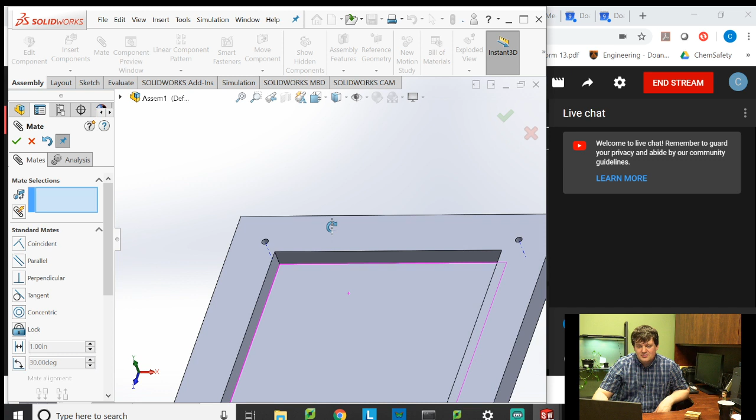That's how I do that. But I'm going to go ahead and hit OK now, I'll get out of the mate menu. Hold on, I can still move this piece. Well, I added a relation where those two axes—if you'll notice, if I'm picking this up and moving it around, I am unable to make this thing move such that those two axes break. Those two axes lie firmly on top of each other, and if I drag this up and around, it's like having a really, really long pin that goes through both of those holes. I can move the object up and down on that pin.

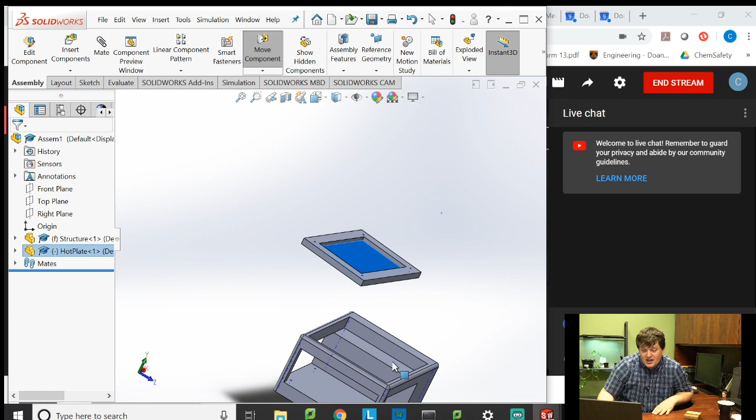Really, I haven't affixed these two items together yet. I have added a mate, which is good, but I'm not done. Now I need to mate this hole here with that hole in there. So I'm going to go ahead and click back on mate. It automatically selects face 1 because that's the last thing I had picked.

Delete that, zoom in so that I can see the axis, click on it, make sure that it says axis and that it's on the hot plate. Zoom out, zoom in. Wait for this to turn orange. Oh no, it just turns light blue, it never turns orange. Axis 2, this is on structure.

I have axis and axis, I want them to be coincident. I'll hit yes, okay, and then I'll click out of the mate.

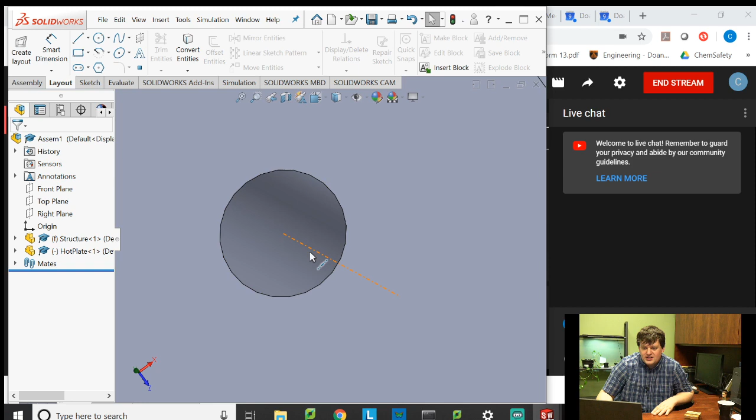Now, when I have done that, if I zoom out here, I cannot rotate this piece at all anymore. It's like it's now on two pins that are infinitely long, and I can just slide this hot plate up and down on those pins. Not the prettiest, but it is still getting more and more defined. Okay?

Now you'll notice I don't have to add mates in these bottom two. I will not, because that begins to over-constrain the drawing. SolidWorks hates when you put too many constraints on something, which is valid. So having just those two bolts in, we're fully defined there, we're done. But I can still move it up and down.

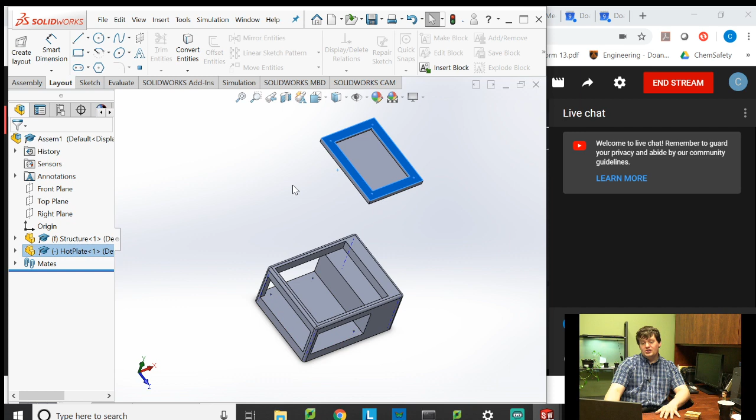I want to make it so that this plate sticks to the structure. So what I'm going to do is select the bottom face down here of this hot plate, and bolt it, smashing it into this face right here of my structure. That's a different mate. So I'll go back into my assembly, click on mate, wait for this to pop up, zoom in, and select this face.

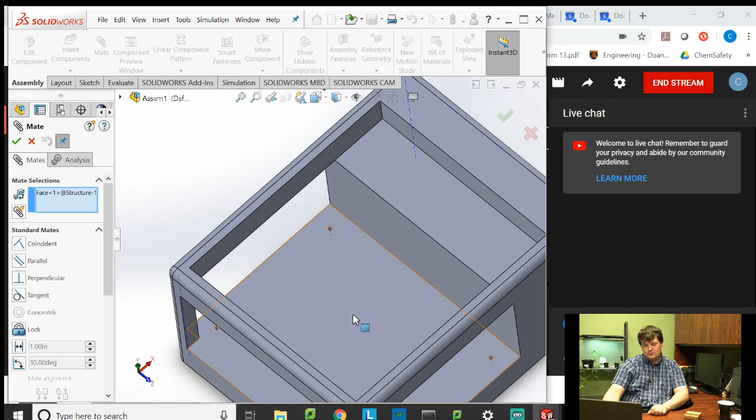You notice it pops up as face. The entire structure turns dark gray because you're not going to mate something to itself. That's impossible, it would require the part to actually flex, you can't do that. So the entire rest of the part gets dark, only the face in question becomes blue. Then you zoom in to the other part, right here. I want it to be the bottom of this face. If I pick the top of the face, it pushes it so that the two parts are inside of each other, that's not so much fun.

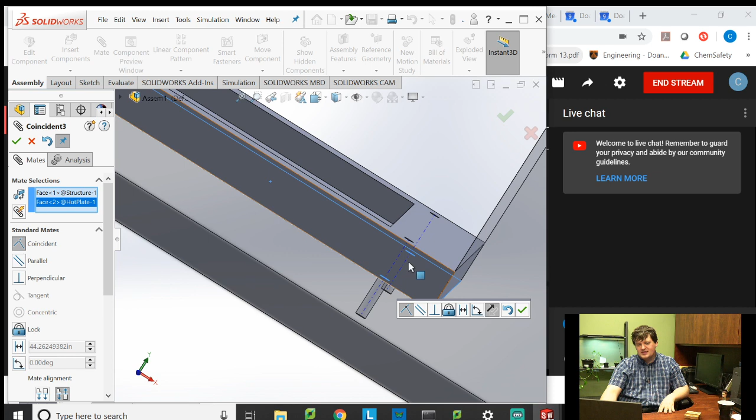But if I click the bottom of that face, and zoom in here, you'll notice my holes are aligned, I got nice cut holes. This piece is sitting on top of my structure, and I have effectively connected them together. You'll now notice this is two pieces.

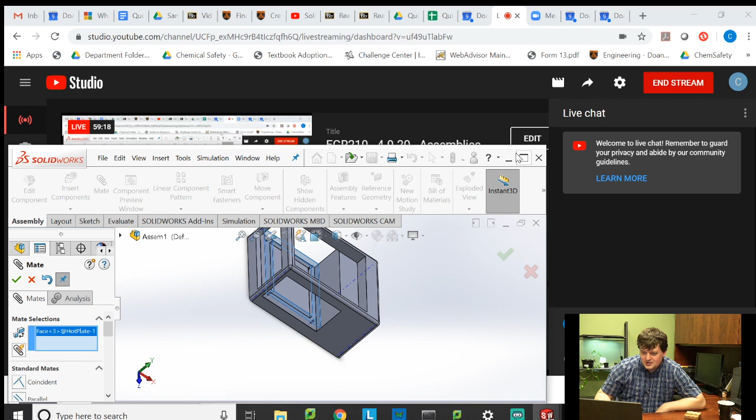If I go in here, click on this... oh, lost my menu because I threw it down there. That's awesome, don't do that by the way. Maybe I can get it back. Look at how many web browsers I've opened at the same time. Thank you, SolidWorks. Come on. Well, I can't do that, so I guess there's no use. Thank you again, SolidWorks.

What I can do is go ahead and click out of this. I can click on Edit Appearance. I'm going to, just for funsies, edit the appearance of this material. I've got the hot plate selected, click Edit Appearance, and I'm going to want this to be black because it's a hot plate. Well, only it's changing the color of the face. I don't want it to be just a face, I want it to be the entire part.

Instead of face, I'm going to go ahead and delete the face and select part. I'm going to go in and actually pick that part. Now the whole part turns black. You can change the transparency, you can change the hue. Instead of being a dark black, I think I want it to be just a darker gray. Okay, that's fun, good for that.

Then I'll go in and do that again for the structure. What color do I want the structure to be? Well, I want this to be red.

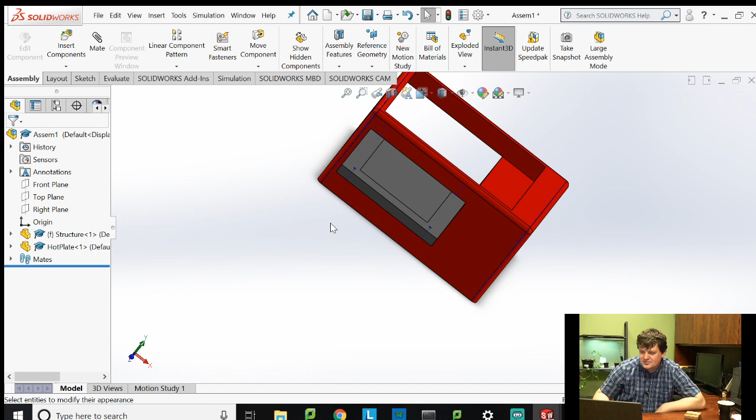But yes, now you'll notice I have two different parts, both looking very pretty, sitting on top of each other. Can't get the right view, so I'm going to click on a corner view of this. Oh, that's fantastic. Nice. Beautiful. And there's my pancake printer so far.

I am going to put in some components up here, an extruder nozzle, and that'll happen next week.

For right now, I'm going to save this assembly file, and save it as - once to make sure that I'm saving all the parts with it, because remember, it's referencing those parts. Save all those parts, and save it as assembly, put it in my pancake printer folder, assembly.